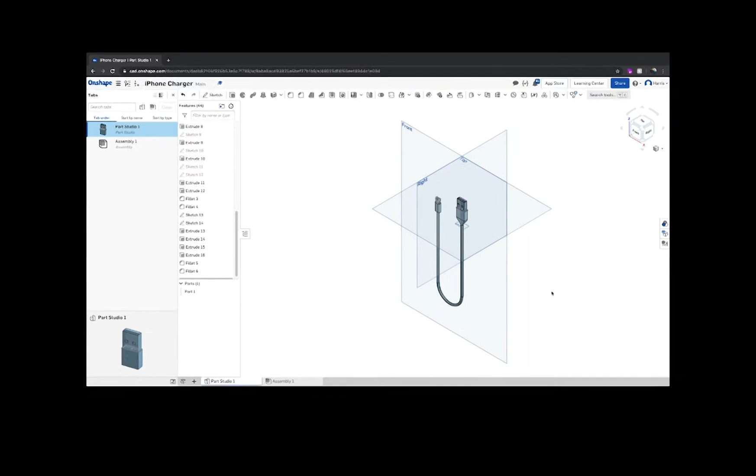Today, my fellow members Ivan and Harris have created a really cool iPhone charger CAD project, and Harris is going to show you how to create your own.

To get started, log into your Onshape account and click on Create. Create a new document and name it iPhone Charger. For this document we will be using millimeters, so to change it, go to the Document menu and click Workspace Units. Select millimeters, click the check mark, and now you can start CADing.

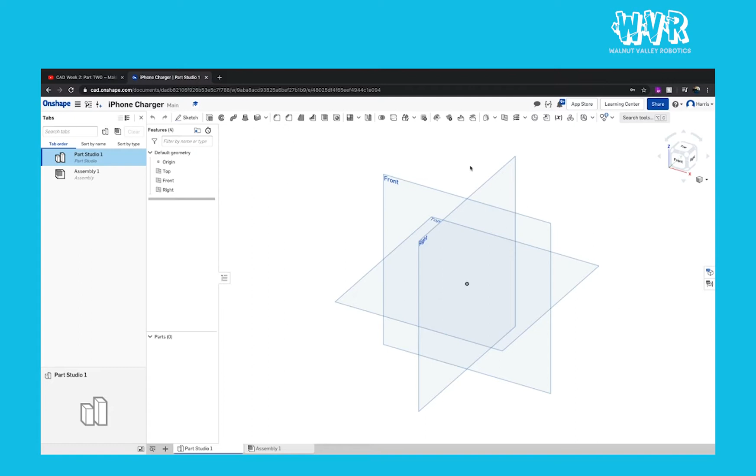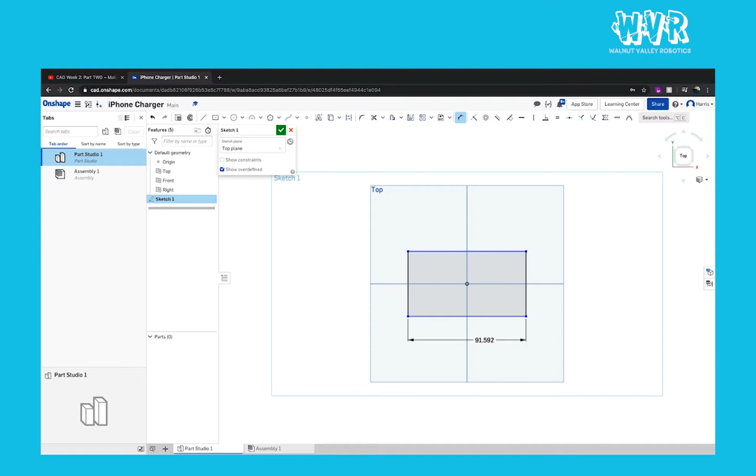Start by clicking the Sketch button, then select the top plane. By right-clicking, select View Normal to Sketch Plane, and start with a center point rectangle as shown. We don't have to constrain it now, so draw one of them first. We can click the dimension tool and dimension it at 13 by 5.5 millimeters.

The first inside rectangle can be drawn now. Constrain the outer rectangle with the inner rectangle at 0.46 millimeters, and do it for all 4 lines. Now the first inside rectangle should be constrained.

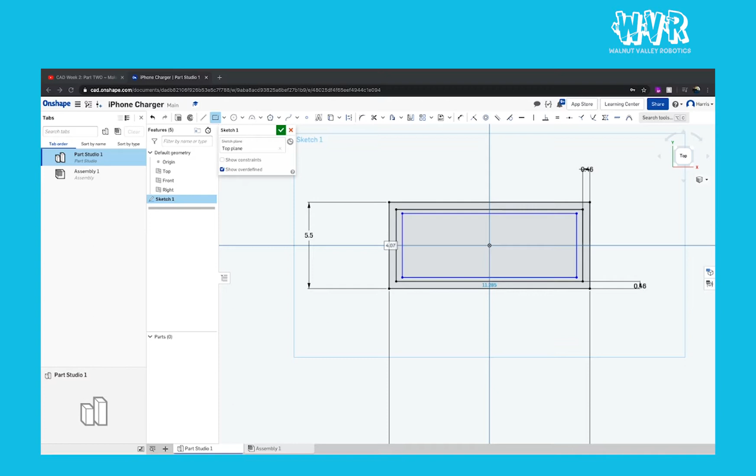We can draw the second inside rectangle again. Please don't constrain it yet. Now we can start putting dimensions on it, doing 0.31 millimeters from the first inside rectangle to the second inside rectangle. Do this for all 4 lines. After that, everything should be constrained.

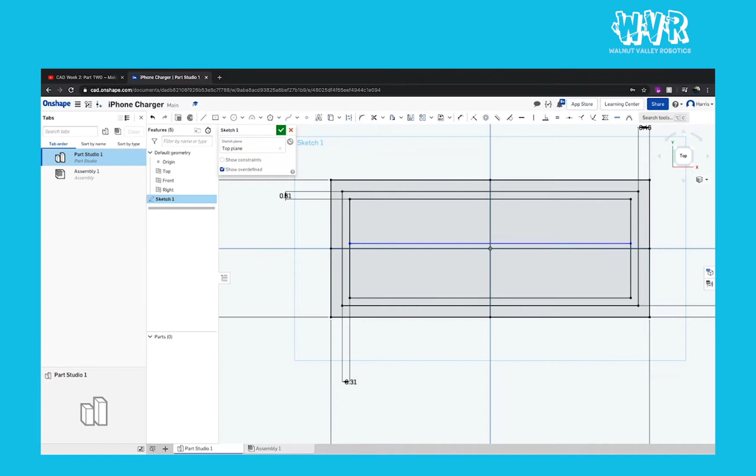Now we will need to add a few supporting lines to use later on. Draw a set of 2 lines at the midpoints of the rectangles. The next lines would be 0.16 millimeters apart, going horizontally, so we can draw them apart first, then use the dimension tool to constrain.

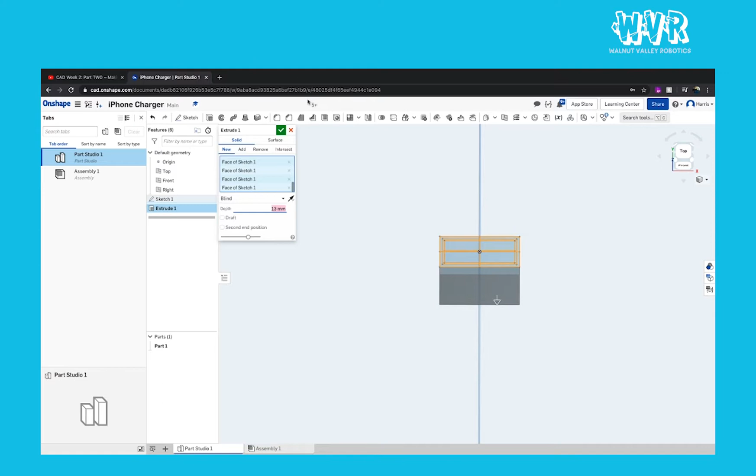After that, we can exit the sketch and extrude. Click on the Extrude button, then select all of the sketches. Now we select the opposite direction and enter 13 millimeters. We can start the second extrude by making sure our sketch is still shown, clicking the eye. We then hit Extrude again and choose these specific parts.

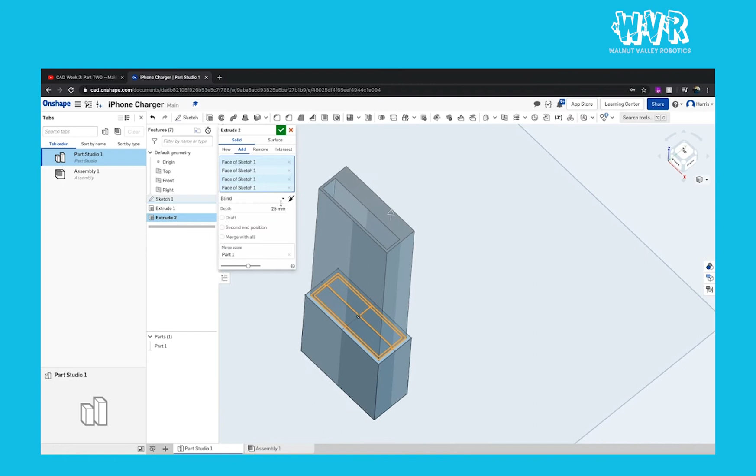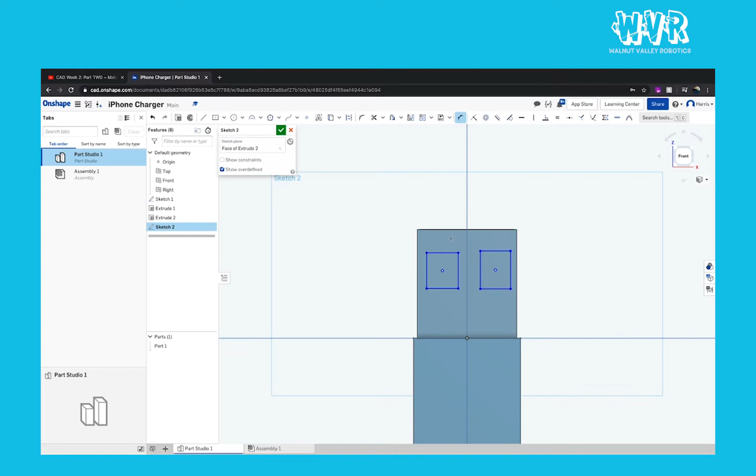Now we can click the check mark. We can start sketching the holes for the USB by creating a sketch on the top left side and selecting the thinner area. We can now insert 2 rectangles without any constraints to prevent issues such as over-constraining. We click on the dimension button to add constraints with dimensions of 2.5 and 2 millimeters.

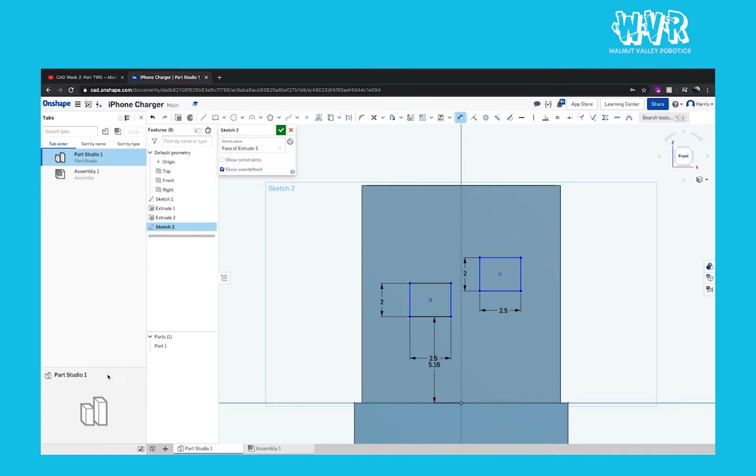The rectangles need to also be constrained with other objects, so enter the dimension here, 5.16 millimeters. Do the same for the other rectangle. Now constrain the other set of parallel lines with a distance of 1.79 millimeters to the outside wall, and the rectangles to each other, 3.5 millimeters apart. Now we can end this sketch.

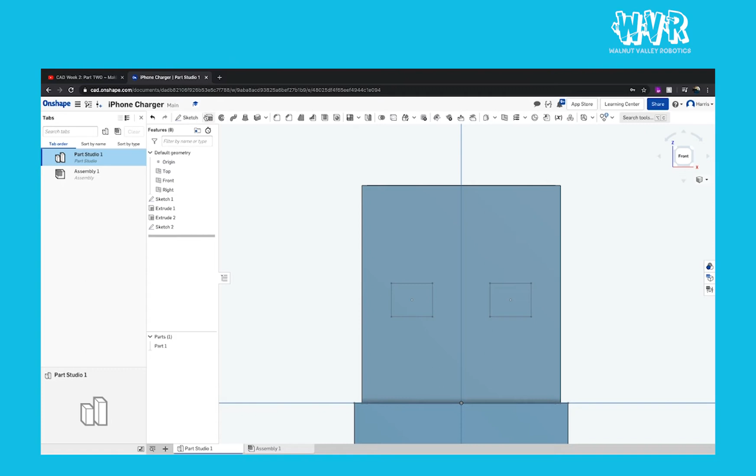When we finish, we can extrude both by 0.31 millimeters, clicking the 2 rectangles and the Remove button, then entering 0.31 millimeters. Now finish. After this, we need to create another sketch on the opposite side.

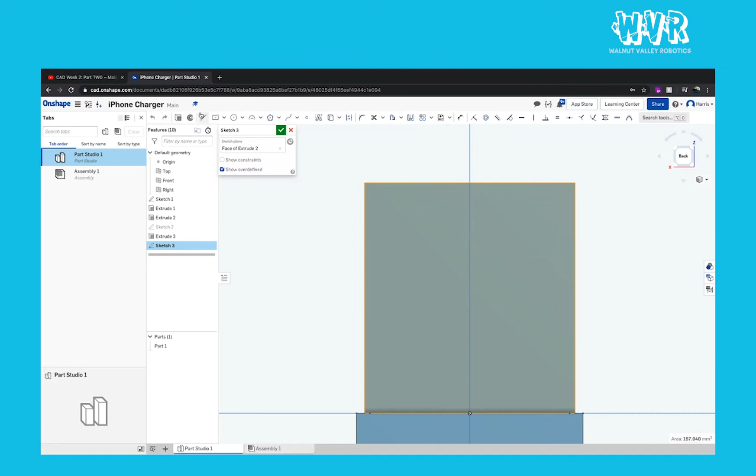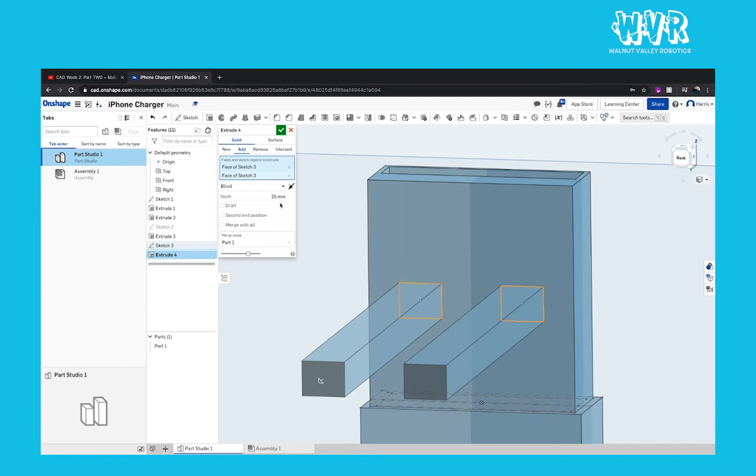We need to repeat this extrude onto the other side, clicking the 2 rectangles and the Remove button, then entering 0.31 millimeters. Now finish. After we have gotten the outside frame almost done, we can start on the inside part of the USB. To start off, let's create another sketch with the plane being the result of extrude 2.

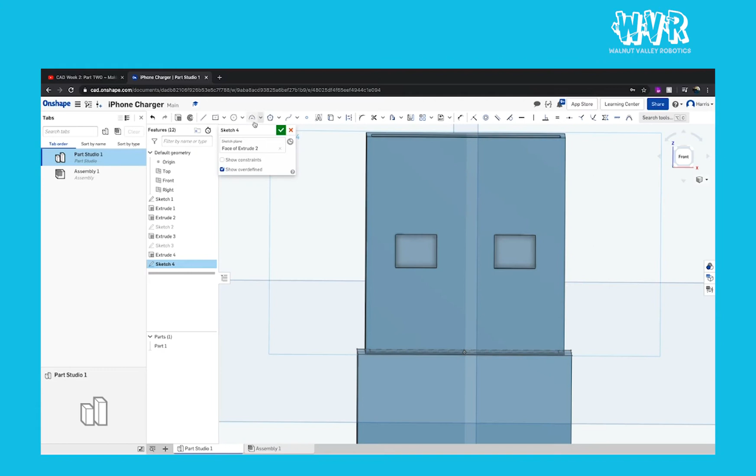We can now start adding rectangles into our sketch, this time selecting a corner rectangle instead. For now, I'll just insert the 4 rectangles without any constraints. We will also draw 2 construction lines by pressing Q or the button.

One on each side, which are just like the lines of the inside of the USB. This allows us to see the line better later on. Now we can click the dimension button and actually start the dimensioning and constraints.

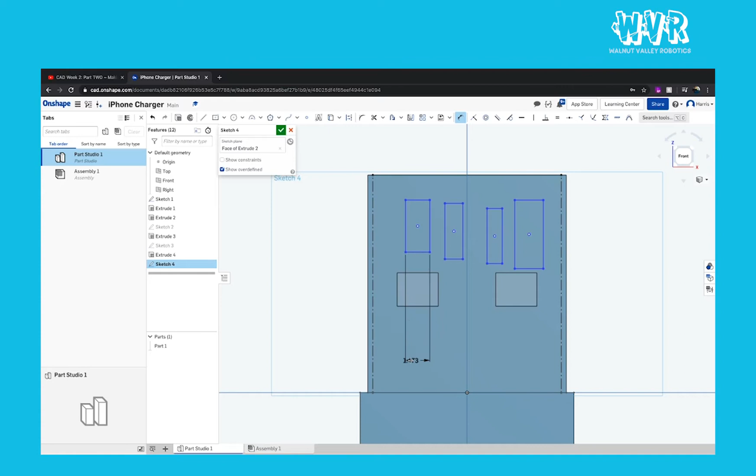Our first set of constraints would be the rectangles, which respectively would be in this order: 1 by 6 millimeters, 1 by 5 millimeters, 1 by 5 millimeters, and 1 by 6 millimeters.

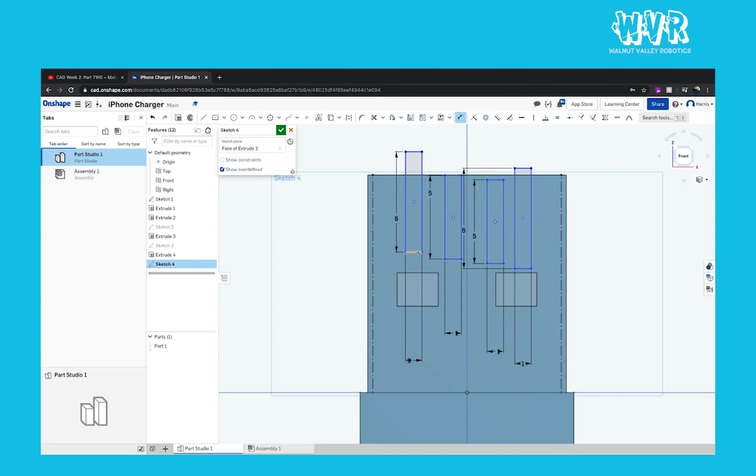Our first constraint would be a 5 millimeter dimension for all the rectangles to this line in the video. Now we can add a dimension of 1.5 millimeters to the outside rectangles to the previous construction line, and a 2 millimeter dimension to the other rectangle.

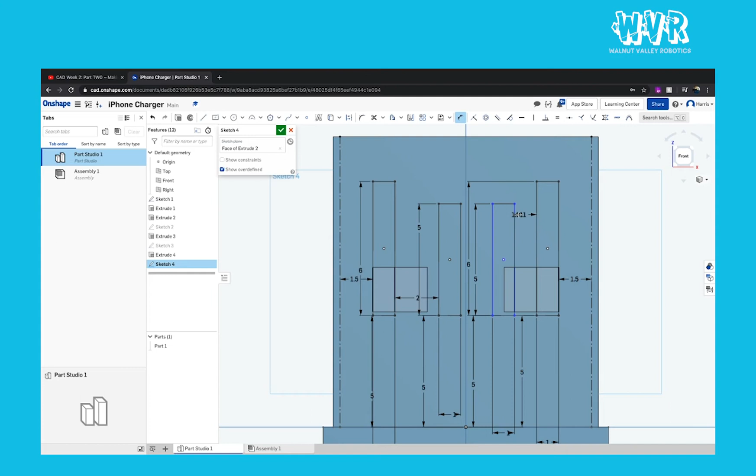By the end, everything should be constrained properly and the lines should be black, not red or blue. We can extrude what we had just made by clicking the extrude button, selecting the 4 shapes and selecting the remove option and entering 0.2.

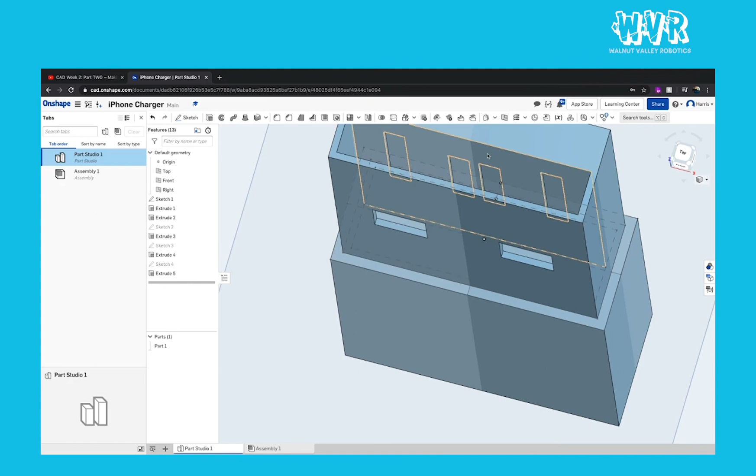After the extrude is finished, we need to add another set of bumps, and to do this, we would be creating a sketch on this plane inside the USB and then click the View Normal to Sketch Plane to see everything normally. We would again enter another 4 rectangles without the constraints so everything is blue.

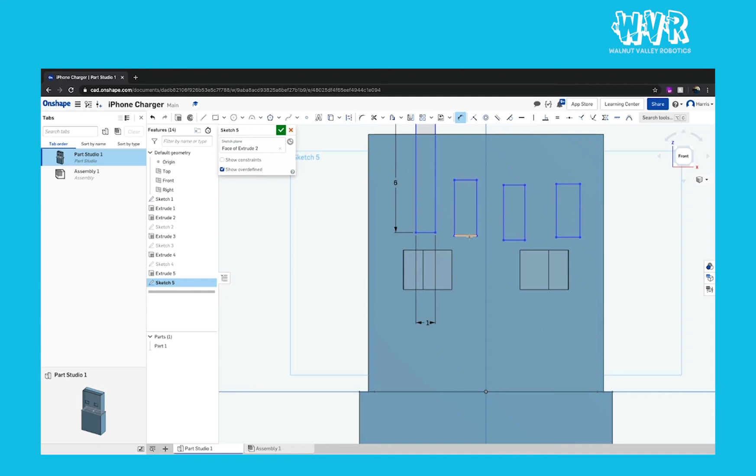Then click on the dimensions option and start from left to right with the dimensions of 1 by 6 millimeters, 1 by 5 millimeters, 1 by 5 millimeters, and 1 by 6 millimeters. Now we need to dimension the rectangles to the bottom line with a 5 millimeter distance.

Now to constrain the rectangles within each other, we need to have a 1.5 millimeter distance between the inside wall of the USB and a 2 millimeter distance from the first rectangle to second, a 0.46 millimeters from the second to a third, and another 2 millimeters from the distance from the third rectangle to the fourth.

To now add the bumps, draw another rectangle, not constrained from anything again. Repeat this for the other 3 rectangles.

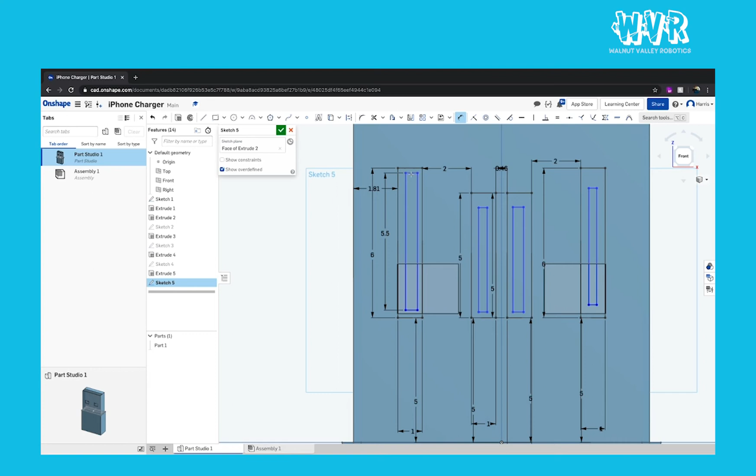To start dimensioning again, we click the dimension button and the measurements of the rectangle from left to right are 5.5 millimeters by 0.75 millimeters, 4.5 millimeters by 0.75 millimeters, 4.5 millimeters by 0.75 millimeters, and 5.5 millimeters by 0.75 millimeters.

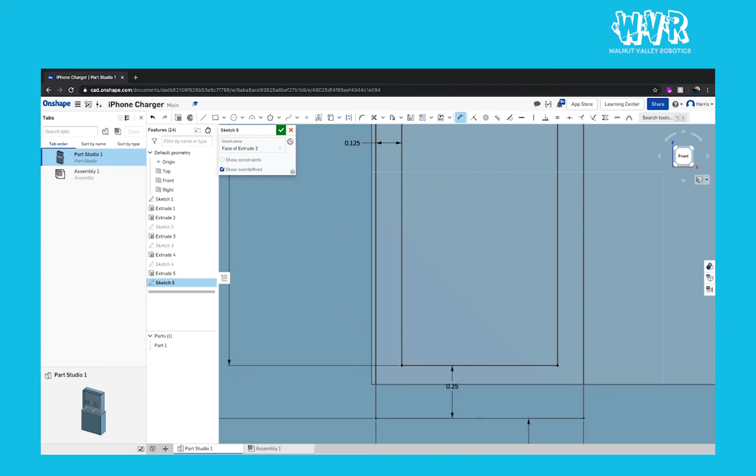To constrain the rectangle, set in the distance between the outside and inside rectangles to be 0.125 millimeters sideways and a 0.25 millimeter distance on the bottom. Repeat this for all 4 rectangles.

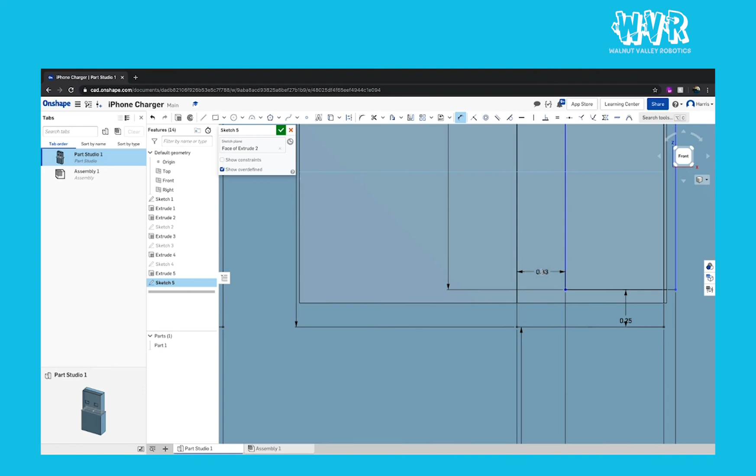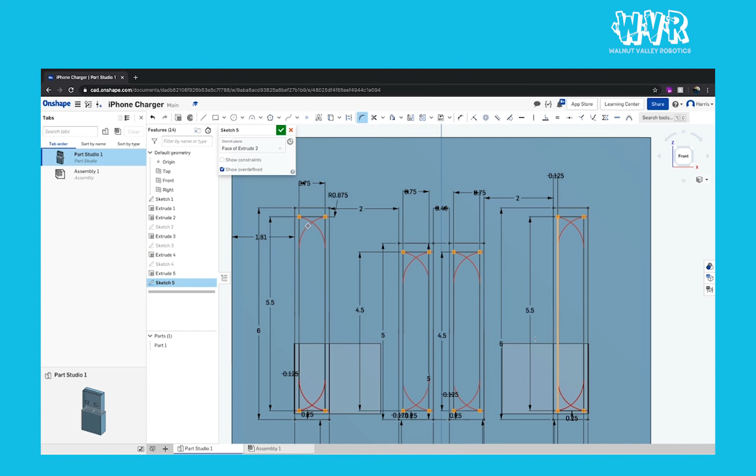Everything should be constrained at this point, so we can now move on to the sketch fillet. Click on the sketch fillet button and then select all the corners of the 4 inside rectangles. After this, click on the dimension and edit it to be 0.375 millimeters.

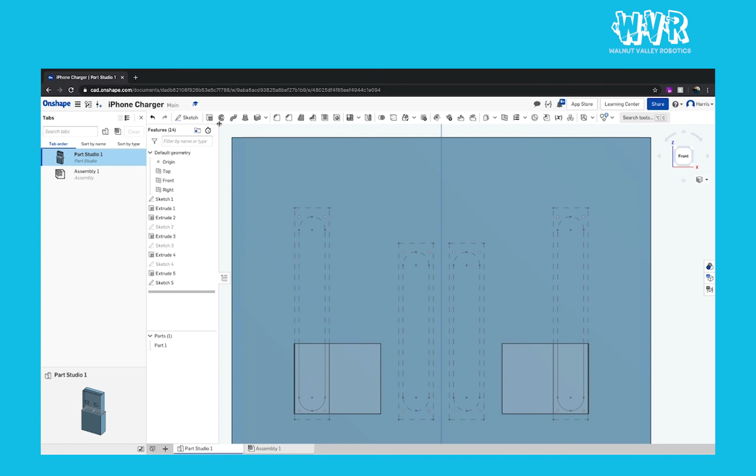Everything should now look normal and constrained. Now, click on the extrude button and extrude the 4 shapes you had just created. Clicking the opposite direction button and adding a depth of 0.2 millimeters.

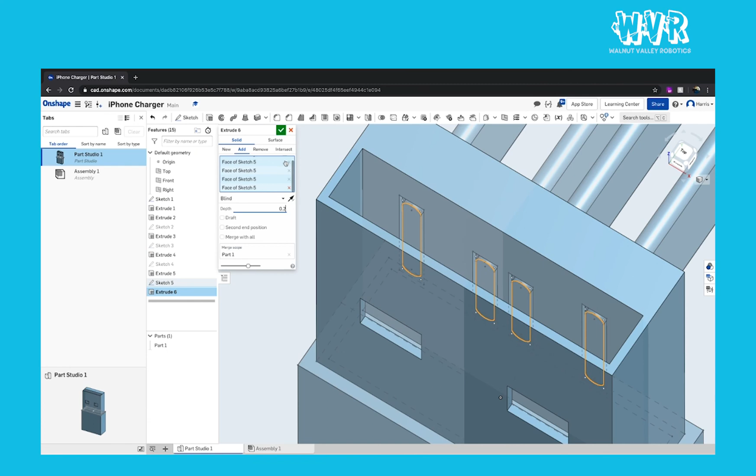Click the check mark. Once finished, we can start filleting the bumps by clicking the Fillet button and then selecting all 4 edges of the shapes and setting the radius to be 0.2 millimeters. Click the check mark.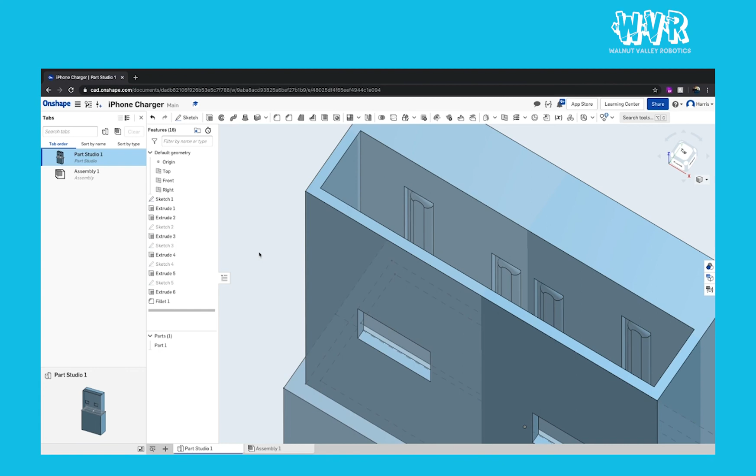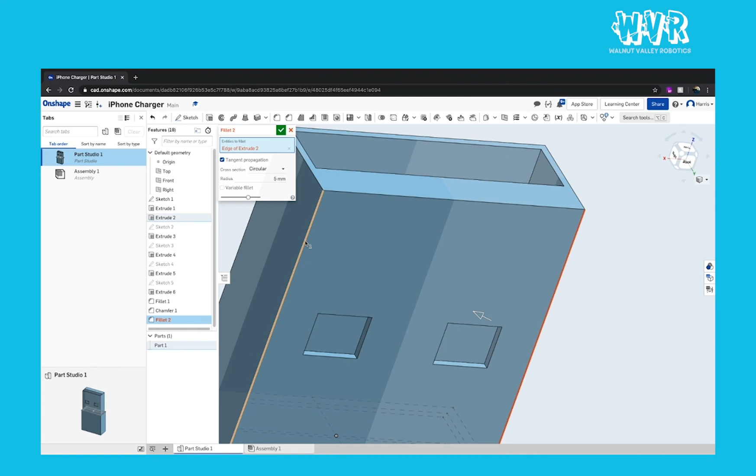To chamfer the edge, click the chamfer tool and select the edge and enter a value of 0.5 millimeters. Lastly, for the entire USB portion, add a fillet to the outside by clicking the Fillet tool and selecting all 4 edges, and then also adding a radius of 0.5 millimeters.